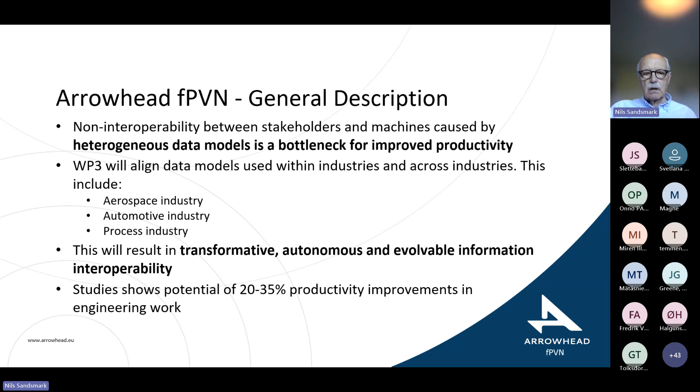We have started out by looking into what data models we should look into and with what standards we should look into, and they are listed here. The automotive work packages, or use cases, they are a little bit special. It's much about how to produce things efficiently, talking to machines instead of pressing buttons, and so on and so forth.

For the aerospace industry, those standards which are listed here are more familiar to at least those of us who have been working in the aerospace industry. And the same is the case for the process industry. These standards should be fairly well known to everybody that is working in the process plant industries.

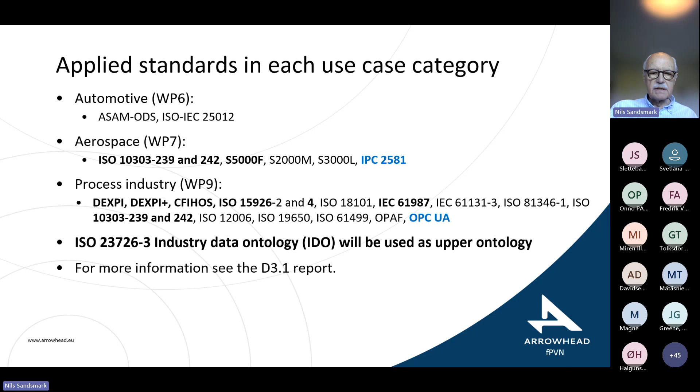What we are doing right now in this project, it is decided that we should use semantic analysis and semantic technology to improve interoperability. And the goals which has been set out from EU is to support the cross-industry interoperability framework. And they want to have the interoperability across industries, not just within an industry. For this particular project, a semantic technology approach is used, and then there are goals about the level of interoperability that we should reach.

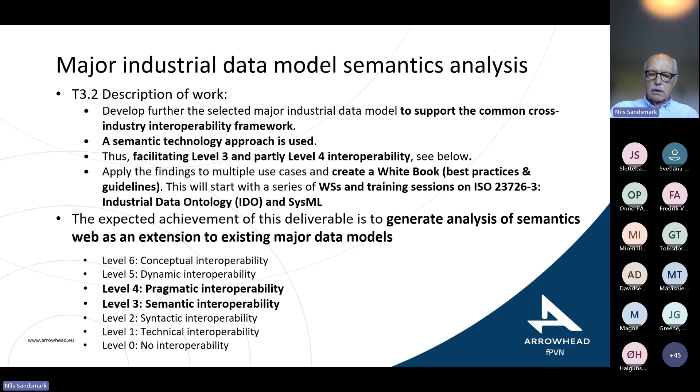The main deliverable is really to create a white book with best practices and guidelines, and this training session is the start of that. In addition to the IDO, it's also a training session on SysML, which is good, running in parallel with this. The expected outcome is to generate analysis of semantic web as an extension to the existing data models. So that is the goal.

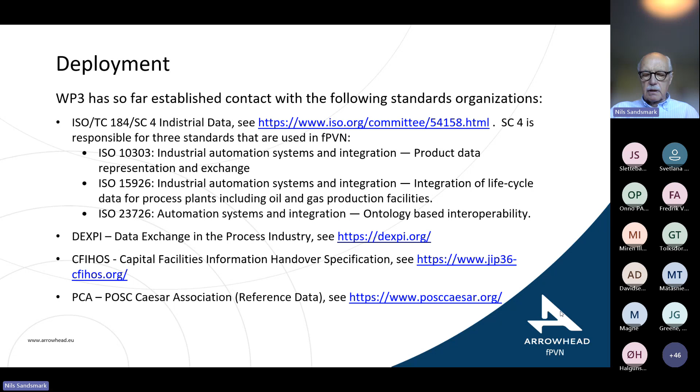And certainly DEXPI, which has been mentioned already, and CFIHOS and PCA, which is the organization I'm working for. That was about the Arrowhead fPVN. Any questions before I go to DISC?

As I already mentioned, DISC is a cooperation between Equinor, Aker BP, Aibel, and Aker Solutions, and it is about interoperability, just like the fPVN project. The goal is to move from a document-centric work process to a data-centric work process.

In particular, the OBI IDO standard is used, and also the IMF information modeling framework is heavily used, and the principle from that standard is coming from ISO IEC 81346 Part 1 and industry standards like DEXPI and CFIHOS. So there is overlap here, and we are trying to do our best to not duplicate work, but to align work so we can all get more out of it.

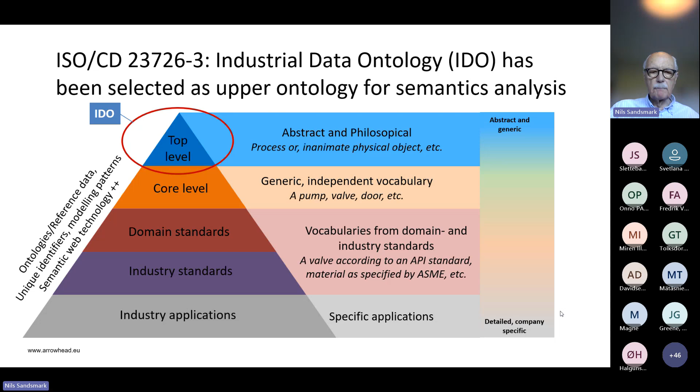So then to the training, the objectives are to provide the necessary training for both modeling and subject matter experts to enable the creation of the modules I just talked about, and also to enable the participants to use IDO to develop interoperability between these major standardized data models.

And I've highlighted a few of those which we think is probably the more important, at least that is where we are starting. We also need to clarify the role of the IMF, the information modeling framework, which is heavily used in the DISC project. And we also hope to be able to create an OBI community, not just a community for IDO that exists already, and we will need to communicate with those who participated there on how to develop this further.

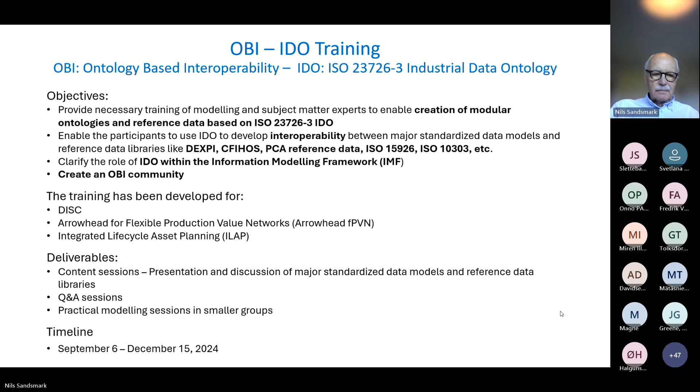This is the schedule. The first is this introduction I'm trying to do now, and then there will be a presentation of the DEXPI model. Next week we are planning an introduction to IDO, then a question and answer session to discuss the IDO in connection to DEXPI.

And then we have the school break in Norway where we won't have a meeting. After that it will be the STEP standard and so on and so forth. So we will come back to what we put in between week 40, between October 19 and Christmas. And we are planning to continue this next year also if this is successful.

So with that, I think I will open again for questions if there are any.

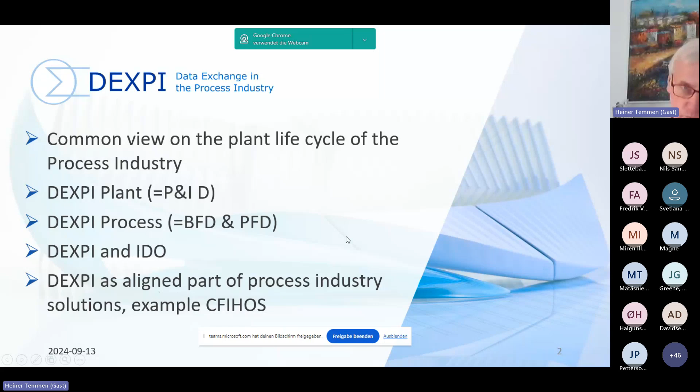Heiner, could you please click on Ausblenden so we can see the full slide? Where is Ausblenden? At the bottom of the slide. Teams is at the bottom, down. Okay, Teams, okay, yeah, okay. Yes, okay, that's the rule from Gregor - he has, in many cases, better knowledge than me.

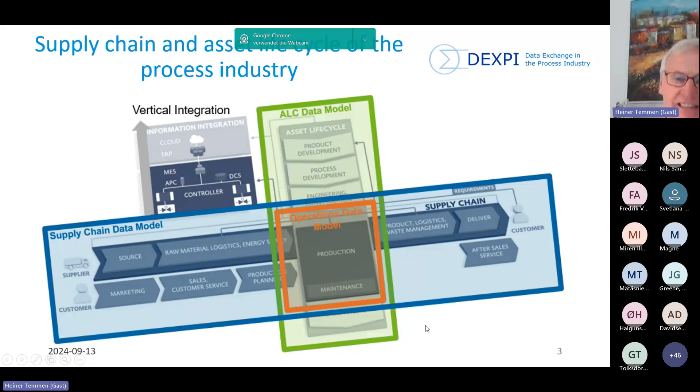Thanks, Gregor. Yes, and then some of us know perhaps the results from the ISO 15926 community with the plant lifecycle model, and there is an important model beginning perhaps with process design. Here we see something, going to detail engineering, procurement, product specification, let's say to the vendor market, to the products, to the manufacturing, to maintenance, to operation. All these things are covered in this model.

And if we have a look at what are the important information structures in this landscape, we see at the beginning there is a world of, let's say, the chemical process with activities like pumping or storing or reacting or heat exchanging or something like that, and the world of calculated streams. Then the next big information structure is about the plant itself. We have a process, and then we have to design in process engineering the first cut of the plant, first with functional and later on with physical objects.

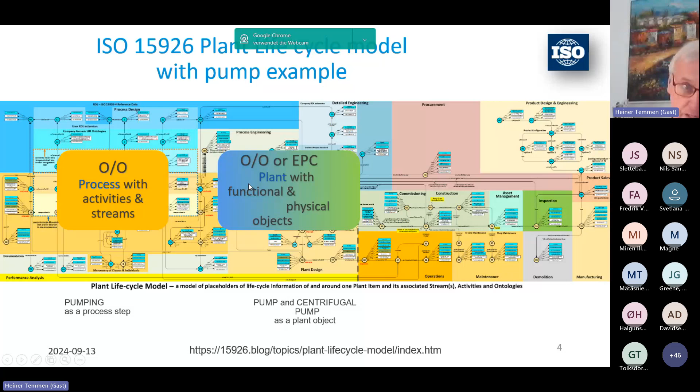In our examples, we have perhaps the pumping activity, and we say, how many pumps do we need for this activity? We decide to use pumps here as color blue. Later on, in more detailed engineering, we say for this kind of pumping we need a centrifugal pump, and we do technical specification for this centrifugal pump. Then we go to the vendor market and look at the product catalogs as non-physical objects, and perhaps we buy one of these products.

Then we have a product which we have bought as owner-operator or EPC, and we invent this as an asset in our owner-operator structure, and we relate this asset to the plant item. That is a central view of the plant life cycle, the asset plant life cycle we have.

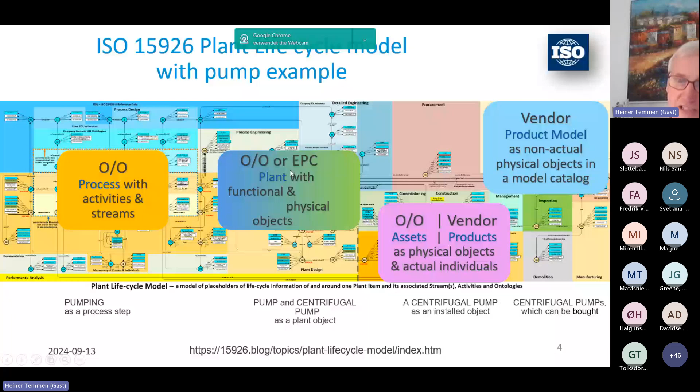With the important structures, process, plant, the world of the assets, here is a combination from the types of devices which were on the market and which were bought as products and invented. The same physical thing is invented as asset here. That is important, that is our view, and we try always to use these structures.

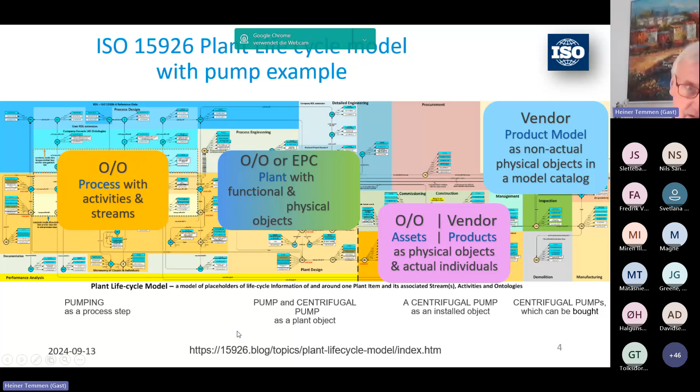And for the different structures, we have the colors orange, blue, green, purple, and pale blue here. We will see this again in a few minutes.

What about DEXPI, our mission? Our mission is to develop and promote a common data exchange standard for the whole process industry, covering all phases of the process plant life cycle, from the specification of functional requirements to the asset in operation. We know this is a huge task, and we started with the model for P&IDs.

Last year we added a different one, the next module for the process structure with the block flow diagrams and the process flow diagrams. Those are the two modules specified by DEXPI. Our other big task is that we are part of the networking community.

We work together with different organizations to get aligned specifications for the whole asset life cycle for the process industry. We see it today with the POSC Caesar specification, with the different projects going on with CFIHOS, with ISO 15926, and so on. That is our DEXPI mission.

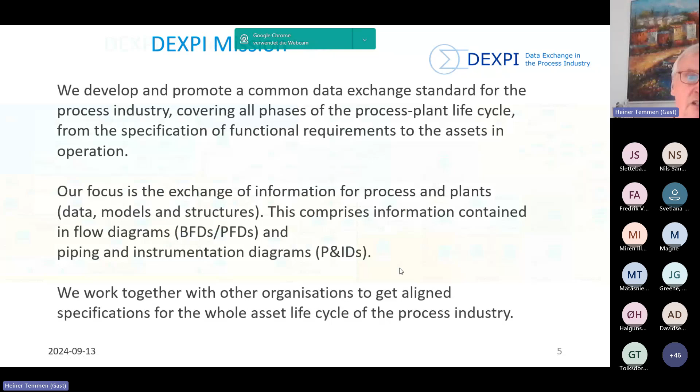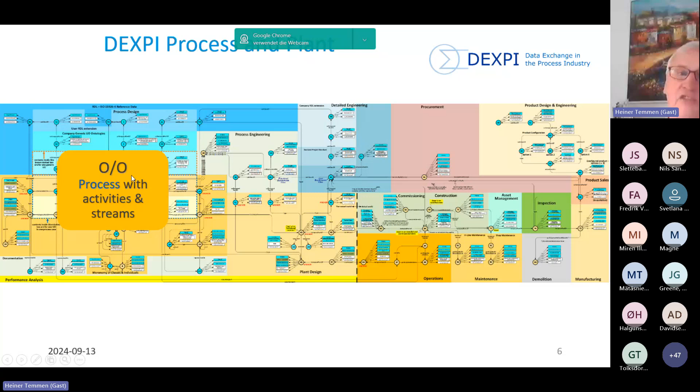Now let's go to the two specifications we developed in the past. The first in the life cycle view for process is DEXPI process, for block flow diagrams and process flow diagrams. Our first big module was for P&ID, DEXPI plant.

Now we use these names. In the past we had only DEXPI and meant, okay, that's the P&ID, but to have a good view on it, we have DEXPI covering both process and plant. For the purple and pale blue world, we from DEXPI have no specifications.

We try to align our specifications with the specifications in this area. We are not able to cover the whole life cycle, but we try to cover these two important areas with our DEXPI specifications.

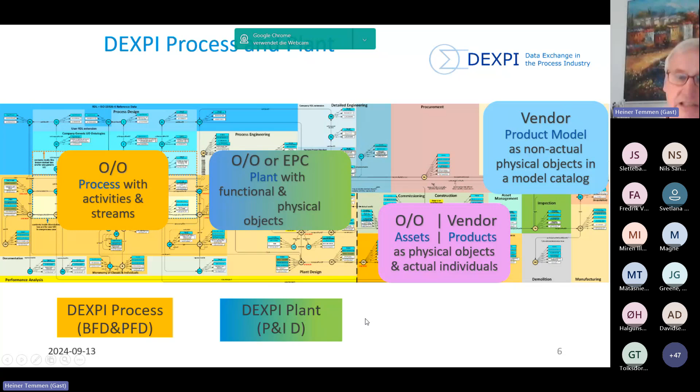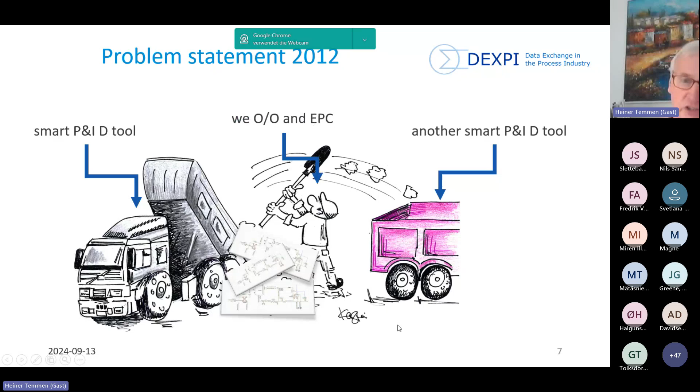Our starting point now 12 years ago was illustrated in this picture. We have different P&ID tools, and what we do in between, if we use an EPC from the view of an owner-operator, the EPC has another P&ID tool, and this kind of working was done by owner-operators or by EPCs. To bring this to a better kind of working was the first big task for DEXPI plant.

Let's say how we tried to solve this task. We tried to think global. It was started by, let's say, some German owner-operators like BASF, Bayer, and Evonik, but all these three companies act worldwide, and therefore we said, okay, we have to think global. And we started with a limited scope.

We know ISO 15926 Part 4 was an important reference data library, and from the beginning we had this in mind. We worked together since the starting point with the important CAE vendors, and they said for them at that time in history, Proteus schema is the best specification for transporting it. Those are our big points which we try to cover.

ISO 15926 and with Proteus, perhaps some of you know Adrian Laud with his XMpLant, and we involved all CAE vendors. We use existing standards, that's important to know, we try not to reinvent the wheel. We had a bottom-up approach, and as I said, to be international, or let's say to be global, was a starting point at the beginning and important for us.

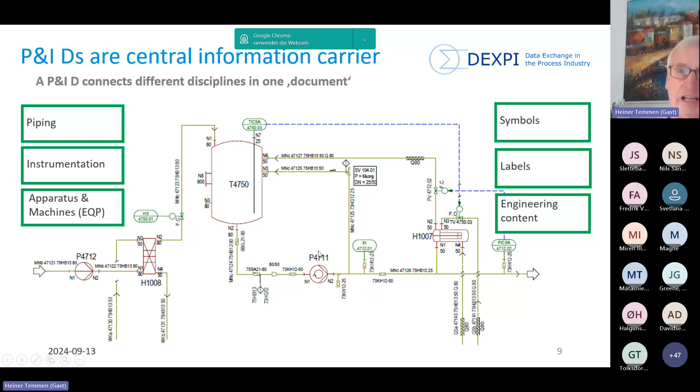In the world of P&ID, the world of engineers, there are symbols, labels, and a lot of engineering content. The whole topology of the plant is illustrated and covered by the P&ID. We see some typical things from P&ID, some more from the older time, from documents.

That is the world of off-page connectors. We have some kinds of annotations, and most P&IDs have a title block - let's say master data, which was important perhaps for the breakdown structures. And that was a task 12 years ago, to define a

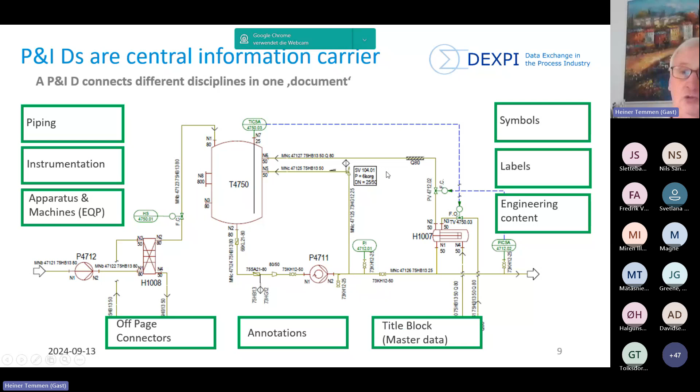We developed some design principles: openness and transparency of the data model. We have test cases, and we communicate everything in our community. We try to use internationally accepted standards, and the important one I will show you on the next slide.

Relations to different life cycle aspects is always important, so that we know where we are. We say okay, we cover the blue and the green part in the middle of our life cycle thinking - that means the structure for the plants.

Important to know: we have a separation between engineering content and graphics, and the order is important. The engineering content was the main driver of our thinking, not the graphics, the old world of symbols. Of course we have to cover it, and how I will explain.

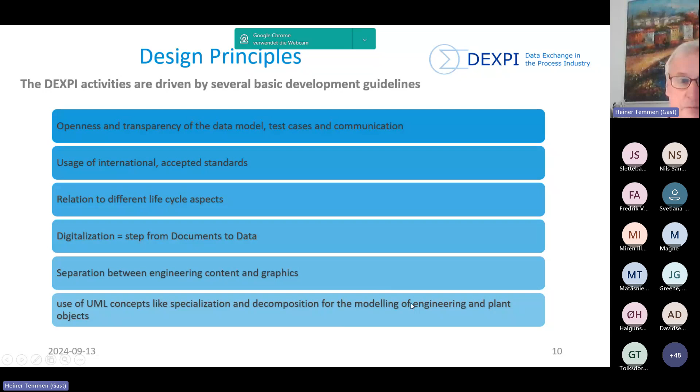And we use UML concepts like specialization and decomposition for modeling the engineering and plant objects. These were our main principles for our design.

Now let's go to the international standards we use. We found that for plant structure, there are important definitions in ISO 10209. For apparatus and machines, for P&ID, we found specifications in ISO 10628, I think part 2, and the same for piping.

There are groups, and the symbols are groups, and our specifications are based on this kind of groups in that world. In the instrumentation world, we used IEC 62424 for the more blue part, for the functional view, and more for the detailing view, a little bit IEC 61987.

And for communication and as a reference data library, we use part 4 from ISO 15926 and the Proteus scheme, which was formerly known as XMpLant.

Very important to know: we use this standard, but it is applicable for IEC, ISA, and DIN-based P&IDs as well. It is not restricted that you must use this standard in your P&ID configuration - it is important for our transport standard. We try to cover all the different standards which were used for P&IDs. That is very important to know.

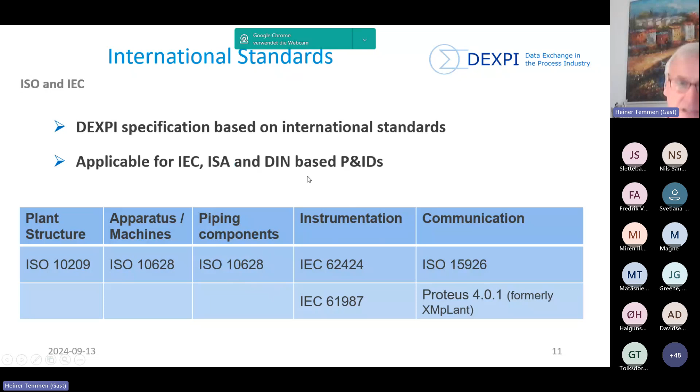Based on international standards, but trying to cover other standards as well. Let us have a look at the different points here, perhaps from ISO

10209. We found some definitions - we had a look at the ISA world, we had a look at the DIN world, and we said okay, in our breakdown structures we use, of course, at the top the enterprise, and then we have the sites. Then there are industrial complexes, and the industrial complexes contain some process plants, and that is the middle of the thinking.

And the process plants have plant sections, and we know in the ISA world, the plant sections have a slightly different name - it's called process unit, and that is the same. Below we have the different kinds of plant items: for apparatus, machines, for piping, for instrumentation, for electrical, and so on.

We support additional structure things, and area is important as a subset for geographical parts of the plant. What is not here - we also support systems and trains in the structure as well. And the major parts in the breakdown structure are process plant and the plant items.

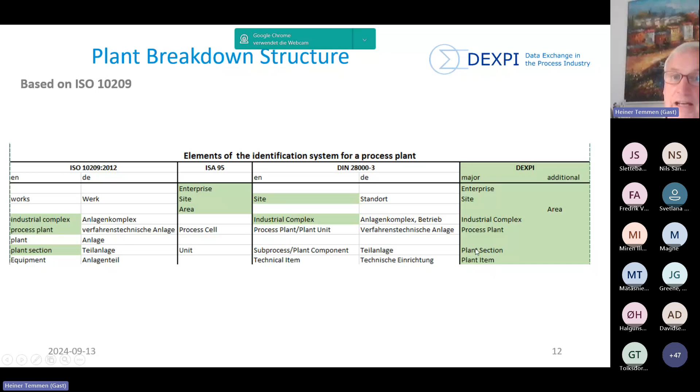Let's have a small look at the apparatus and machine taxonomy. We use the groups from ISO 10628 with its 21 groups. For that we have vessels, pumps, heat exchangers, and so on, with the color blue. That is the functional design level for a plant. Then there are subclasses for pumps, such as centrifugal pumps, oscillating displacement pumps, and some other types. That is the level in green for the asset specifications, the subtypes of the functional design objects.

Sometimes we have to go a little bit deeper, and this kind of thinking about how deep we should go is based on the maintenance standard for oil and gas, ISO 14224. ISO 14224 has, in our view, two important concepts. One is maintainable item - we have to look at impeller, displacer, nozzles, gearboxes, and so on. The other concept is the boundary concept: which components belong to which apparatus and machines? There are answers in the concept from ISO 14224. These two concepts are main design principles we use as well in DEXPI.

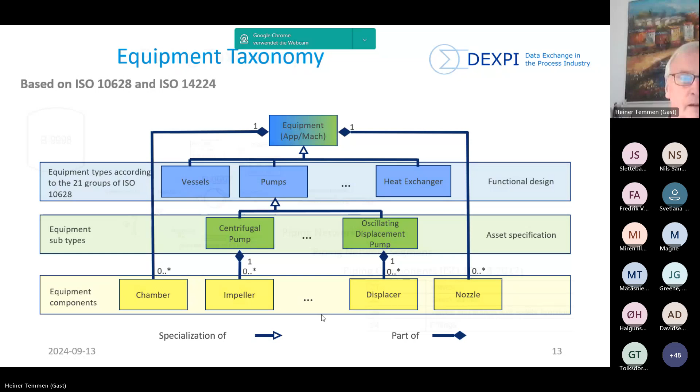Have a look at the piping taxonomy, also based on ISO 10628. We found in that specification that there are 4 groups: 21 for valves, 22 for check valves, 23 for valves and fittings with safety functions, and 24 for fittings. There is a discussion that from the ISA thinking, group 23 is not under the roof of piping - it should be more related to the discipline of instrumentation. But we use the ISO 10628 concept; it's not important which discipline handles it.

We have a look at the topology, and we cover both concepts, whether it's related to the instrumentation discipline or to piping discipline. Not important, but important to know is that safety valves are part of the piping taxonomy, based on ISO 10628. Here we have several different groups - valves like ball valves and so on, and different kinds of fittings. We cover all the objects defined in these 4 groups of ISO 10628, and we found some more in different projects and added them. Perhaps in CFIHOS we have some more, and we will add them.

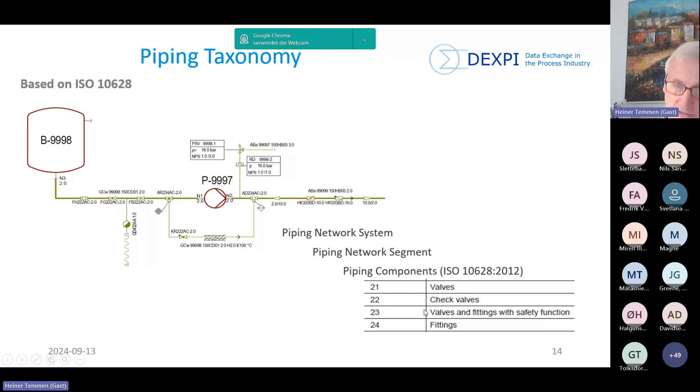Instrumentation is the discipline where it is very difficult to design a model, and we had heavy discussions. But since this solution, from 2016, we think it covers many of the different standards which were used, including ISA standards. We have the blue part, the functional model, which is more based on 62424, and the green part is more based on IEC 61987.

In the middle, as we have here in the pictures, we always have the bubbles, and the bubbles are represented by process instrumentation functions. That is a term from ISO 15926 part 4. In IEC 62424, the name for this is PCE request. But we have a common view - let's say, different terms for the same thing.

For the different bubbles, we can put them together into loops, and there are different children possible for a bubble that is sensing something. We have process signal generating functions, and for actuating, we have the actuating function, and signals between them. To cover actuating electrical functions as well, perhaps for a frequency converter or to control heat insulation things, we have an additional part for actuating electrical functions.

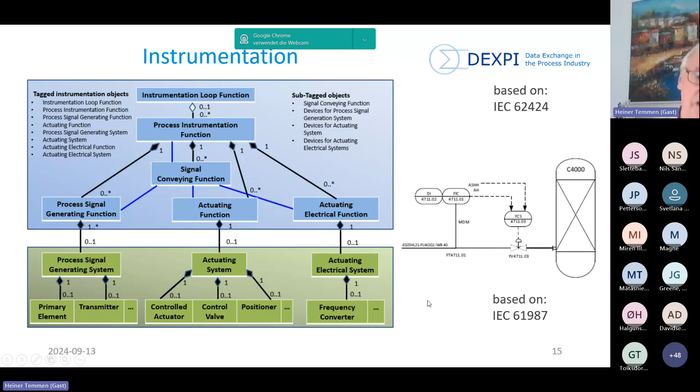We tried at the beginning to do tests that this model covers the IEC world, the ISA world, examples in the DIN world, and so on. We know nearly every company or every region has its own standards, especially for the world of instrumentation. I said something about symbols, and in the Norwegian community, the NORSOK standard Z-004 is important.

We know DEXPI is a data-driven standard. But symbols we also consider, though not as a primary part, only a secondary part. We can relate symbols to every instance of an object. We found that there are two standards for how to handle symbols: one is IEC 81714 part 2, and the other is ISO 15519.

In these two standards, there is a definition that a symbol can be identified by four parts. First is the domain, second is a symbol number, third is an orientation, and fourth is the version. With this concept, it is important that with the DEXPI concept, it is possible to change symbols, exporting the P&ID and importing the P&ID. Here is an example for a centrifuge, from the NORSOK standard, and it has the number PE030A.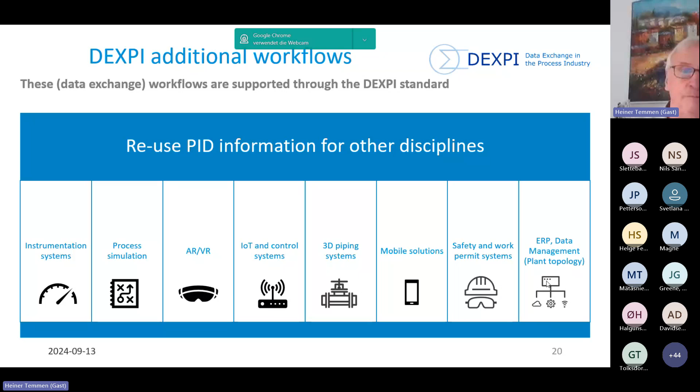Let's go to the second specification. The DEXPI Process addresses a blind spot in the standard landscape. I do not know if David Cameron, the main author of this concept, is on the call—he is the main author of this concept, using all the concepts from DEXPI Plant.

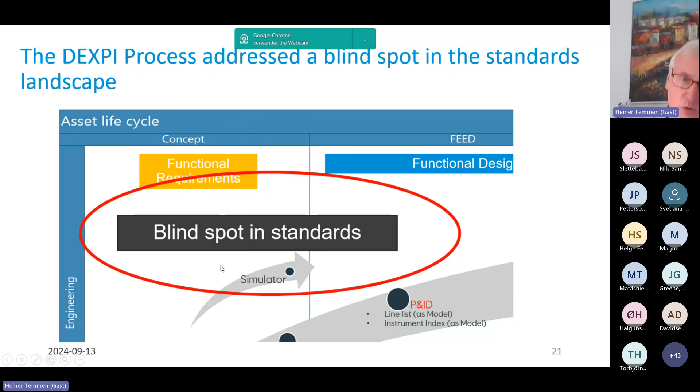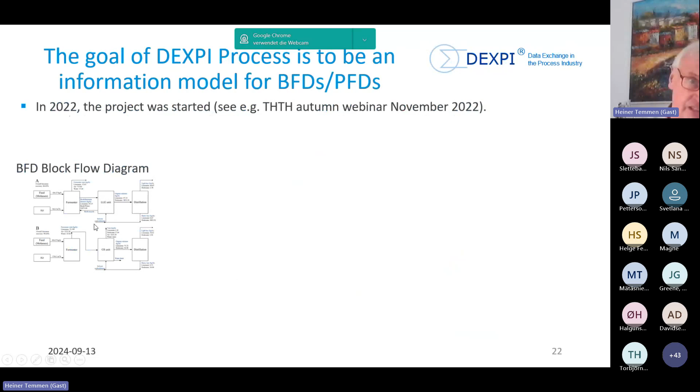For this part, in the first phase of the asset plant life cycle, there was no standard, and this is now covered by DEXPI Process. DEXPI Process was started 2 years ago, and it covers not the P&ID, but the block flow diagrams and the process flow diagrams. This process model is based on this specification and covers that.

And we saw what I tried to explain before is the P&ID with the piping and instrumentation diagram, and that's for the plant model. We use for both the same concept, and this is now, let's say, the brother or the sister of the plant model. Now we have an additional process model.

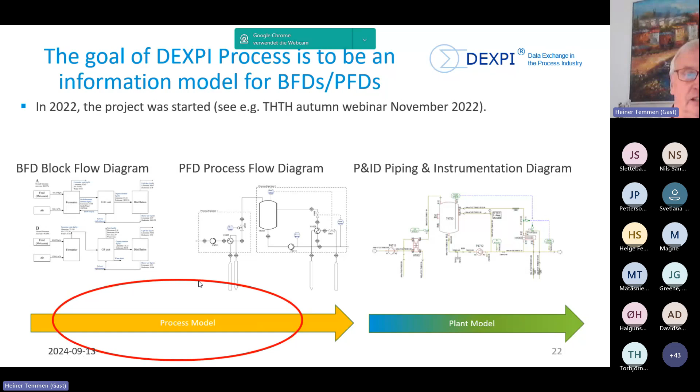This process model covers the world of the calculated streams with the material template and all the components of the streams, and all the things which were covered here, and the input from that also with the principle to use standards which were implemented with CAPE-OPEN and OntoCAPE.

Based on that, David designed this model, and there is a hierarchy of the process steps—the process steps, what must be done, and then how it should be done, and that is a little bit deeper, the level of unit operations with the component systems.

The upper part is more for the block flow diagrams on that level, and the lower part is more for the level of the process flow diagram. Here we have the typical things we need, perhaps for heating, cooling, heat exchanging, separations and so on, and that's all covered by the DEXPI Process definition.

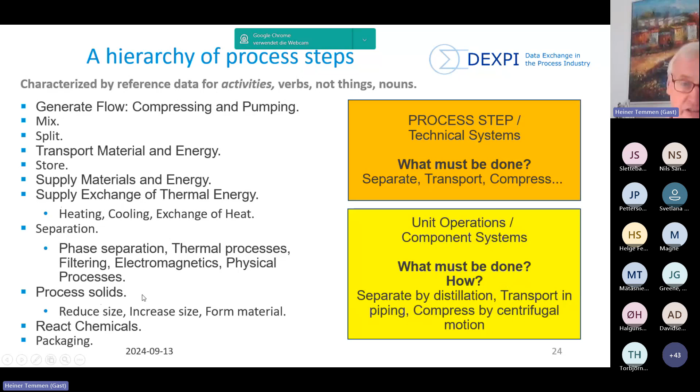And the classes we have here are also classes from part 4, which, as I said, is our main reference data library. Last year we published the result of this project, and everyone can have a look at this first manual.

We have this as a released specification, now 9 months old, and David has a very good publication about DEXPI Process which can be used to understand the concepts better—David is the main author of this publication. And now the next task is for Gregor and the world of content and handling the specifications.

We have 2 specifications, and now we will build a common specification for both. This one we use, as I said, here in the plant world—we have Proteus, and I think, not officially, but I believe XMpLant or Proteus will become more history, and newer serialization formats will cover both in one release, DEXPI 2.0.

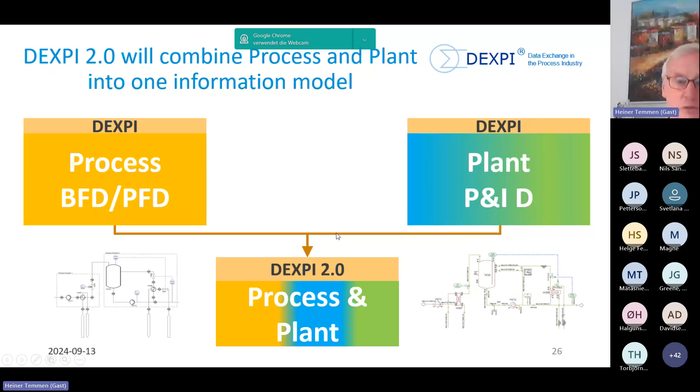I'll use some more minutes to explain what we will do with IDO together and with CFIHOS, and then I think we have time for questions and answers as well. Is that okay? Yes, that's okay.

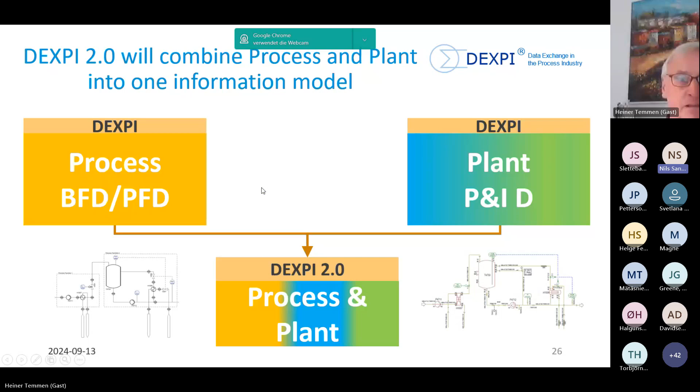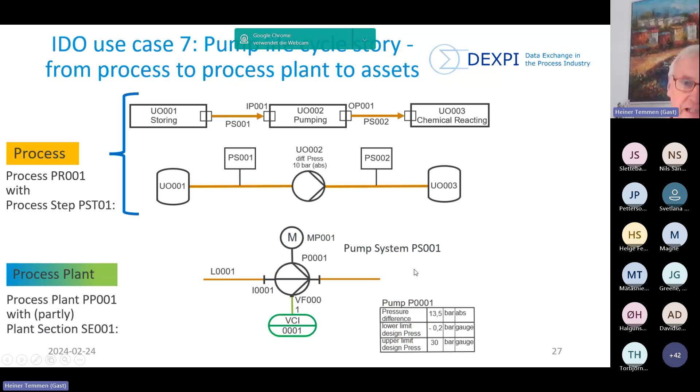We defined a pump life cycle story from process to process plant, and what's not on the picture, to assets. We have an example defined, and now we try, that is IDO use case 7, to solve this use case with the concepts from IDO. It's not so easy, but we are on a good way, and with support from Torbjörn and especially from Dirk last week, we had first solutions for some of these things.

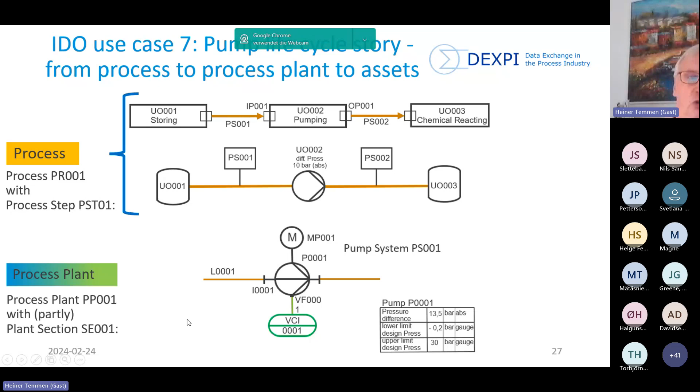We have to continue the work to solve this use case with IDO concepts. What we will do more is continue the work with use case 7. We have the two ontologies under the core ontology from IDO, and some of the process definitions we need for DEXPI process were in that process ontology, but not all, and we should try to populate it with all we need. The same is for DEXPI plant - there is the corresponding ontology in IDO equipment, and we should try to populate all needed classes in that ontology.

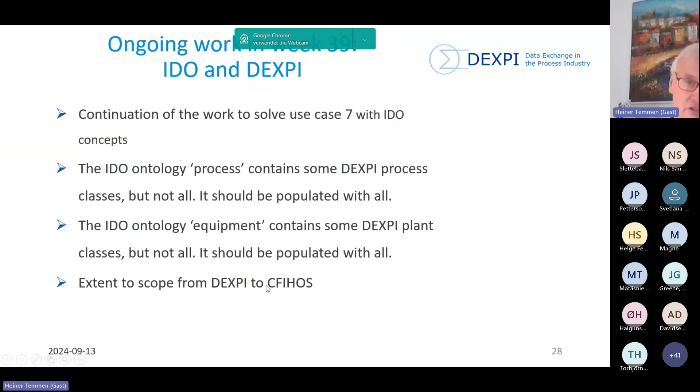What we have done for DEXPI is also possible for CFIHOS. CFIHOS is an important initiative. I don't know how old this initiative is - it's now, I think, 4 years under the roof of IOGP, and the years before it was under the roof of USPI. It is a handover specification, the oil and gas handover specification. First, in the early years, it was more document-driven, and now it is more data-driven.

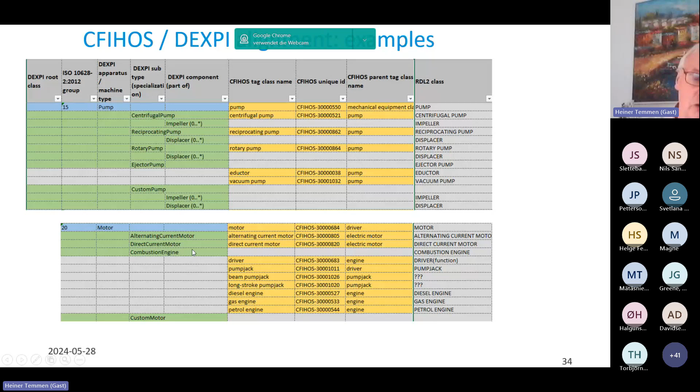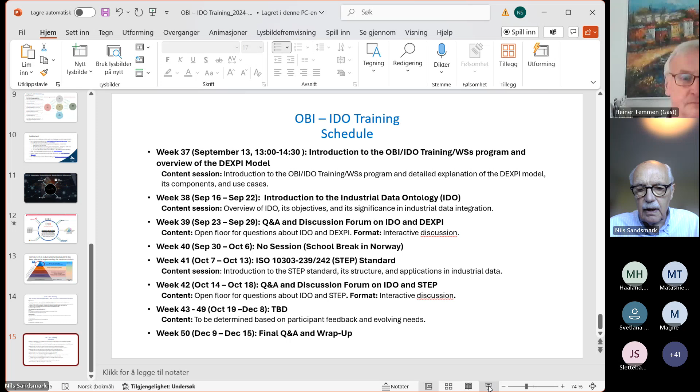We are approaching the end of this meeting, and people are starting to leave. So I think we've tried to do this. Are there any burning questions before we stop?